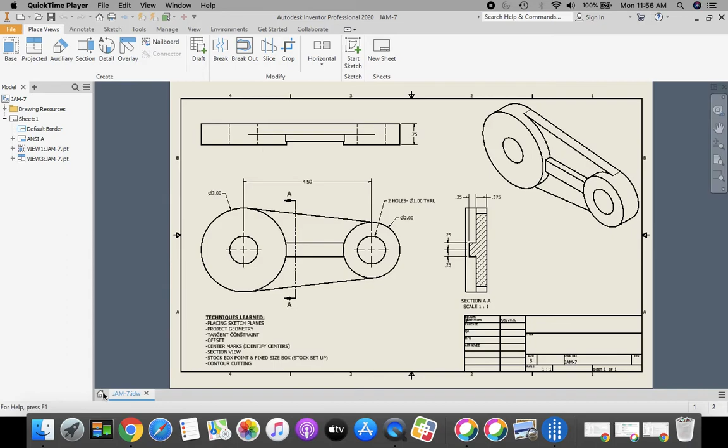To begin, from our home screen in Inventor, we're going to go to New in the ribbon bar, select Standard IDW, and click Create.

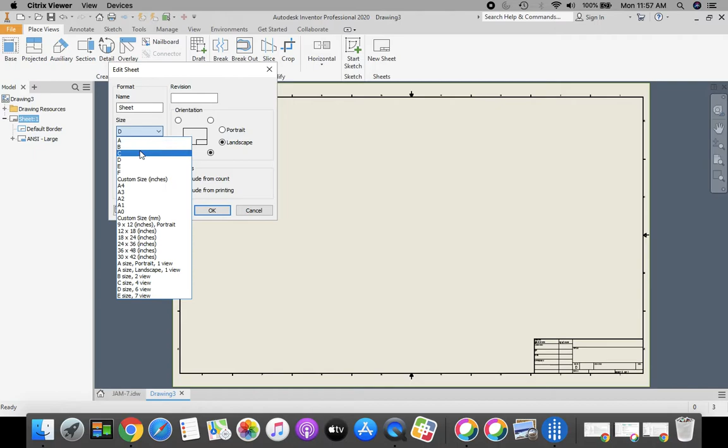First off, we're going to change our sheet size. We'll come over to our model browser on the left-hand side, right-click on Sheet 1, go down to Edit Sheet, and change this size from a D size sheet to a B size sheet, then click OK. Next, let's come up to our ribbon bar at the top and select the base.

We're going to go to our Browse folder with the magnifying glass, and in our H drive, we'll scroll down and find our 7 Jam part, then click Open.

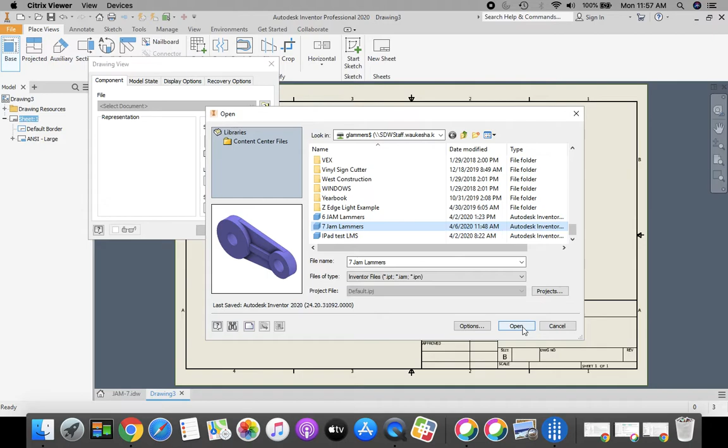Before we click OK, we're going to change the scale of this. It came up for me as half scale, so we're going to change it to 3/4 scale. Once you've done that, select OK.

Bring your cursor over to the front view of your part until you get that red dotted line, and then push this over to the left-hand side, making sure you're still staying above the title block.

Next, let's get that top view that's projected. We'll select the top view to project it. Mine automatically locked on here with a graphic. If yours does not, click projected, come to your front view, click on it, and then it should project for you. I want a top view, then I'll right click and create that top view.

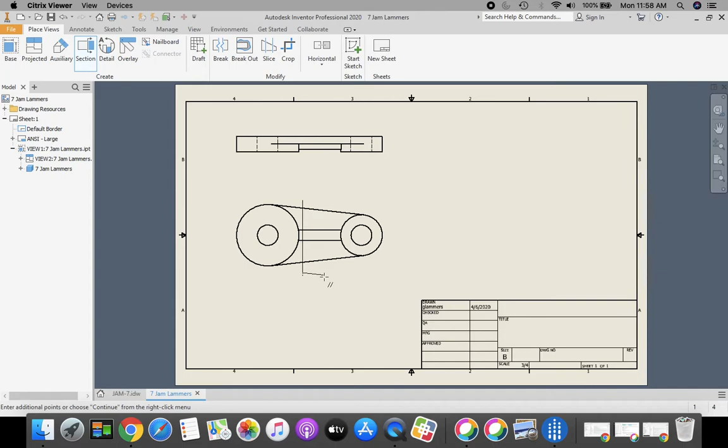Then for my section view, I'll come up here where section view is highlighted and click. I want to come right through the middle of this rib without going through a circle, so I'll click and stretch a line down. That looks pretty good, just make sure it's not coming through that circle. Then right click and continue, and now there's my section view, which I'll place on the right side.

Now I'm going to go back to projected views, select projected views, click your front view, and now I want that pictorial isometric over here on the side. Right click, create.

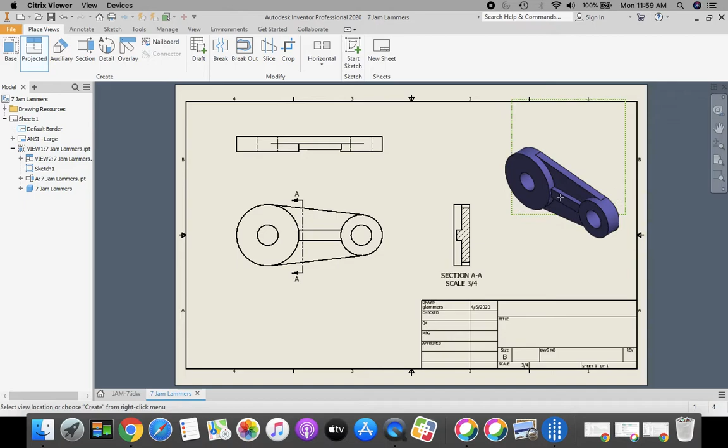Okay, now let's place those dimensions on here. That's done through our Annotate tab at the top. Change from Place Views to Annotate, and I'm going to dimension.

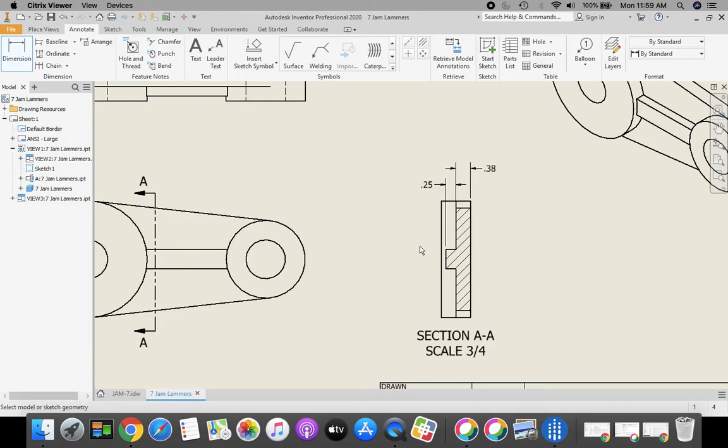I'm going to dimension my thickness, coming in here on my side view: thickness of that bottom, thickness of that rib. We could also do the thickness of our overall part up here on our top view.

Now, before we start dimensioning our front view, we're going to come up to the top and place center marks. Click center marks right here, click your 2 circles, and now we're going to place our dimensions from center to center, placing our dimension on the side, and place the diameter for the other one and our holes here.

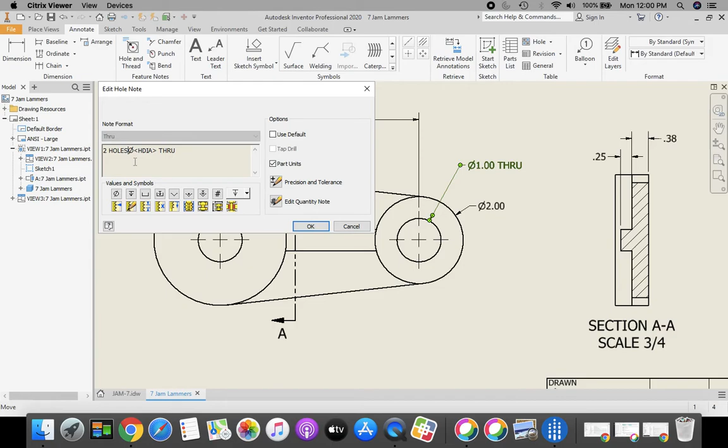Now if we just place a regular dimension, we only get to 1 inch, it doesn't give up the depth, so I'm going to press escape on that. We're going to use our hole and thread option for things that are holes. Go back, click on that, and now I get all the way through. Press escape. I can click on this dimension, put my cursor in front, and add the note of 2 holes, click OK, and see how that adds that dimension in there? Wonderful.

Alright, next we have our dimensions on here. The next thing we're going to do is come up to File in the top left hand corner, the orange file, and go down and save this part. So we'll save as, make sure this is going to your H drive, file name still the same, and click Save.

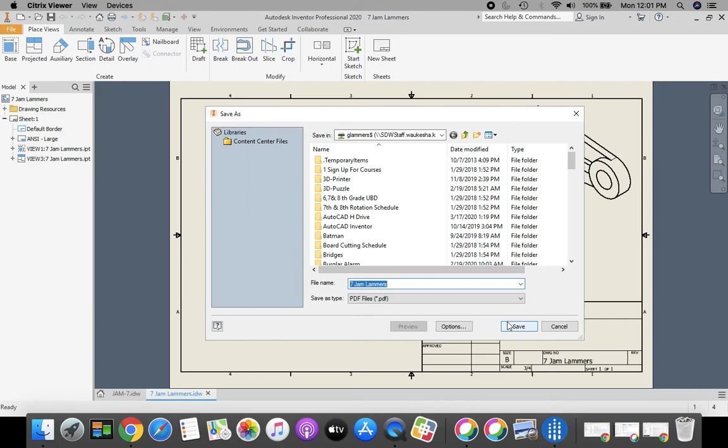Now we have to prepare it as a PDF to turn into Google Classroom. So let's go to File, orange file in the top left hand corner, go down to Export, and export PDF. Still going to my H drive, file name is still fine, click Save.